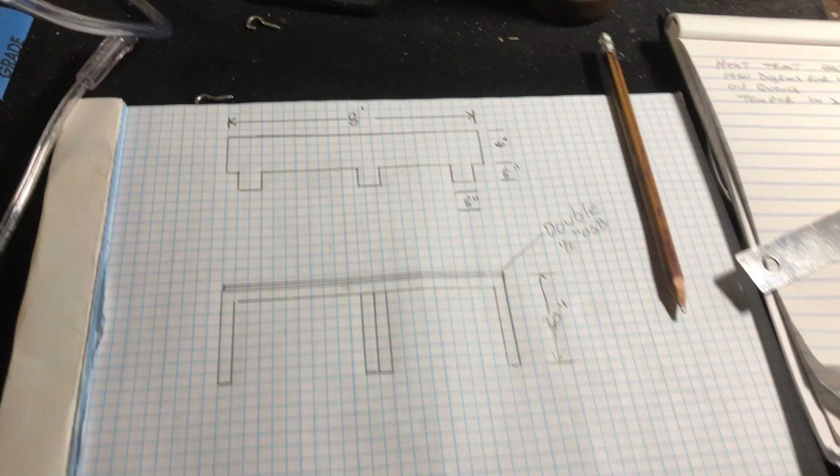Oh yeah, we're in the planning stages. I'm making a bench for my buffers. I'm gonna redo my buffing room.

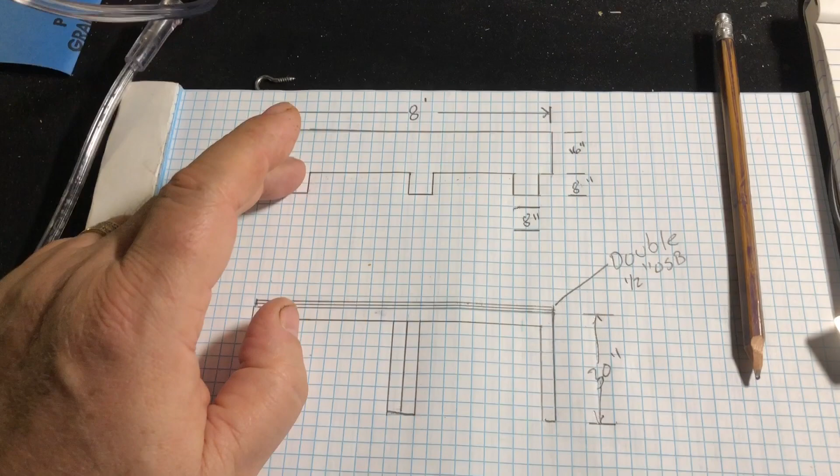I've ordered a second buffer, like my first buffer, the yellow one. Those two buffers are 22 inches wide, and the last buffer is not near as wide, I think it's 16, which is why there's more space here than here. So I'm going to have 6 buffing wheels at this station.

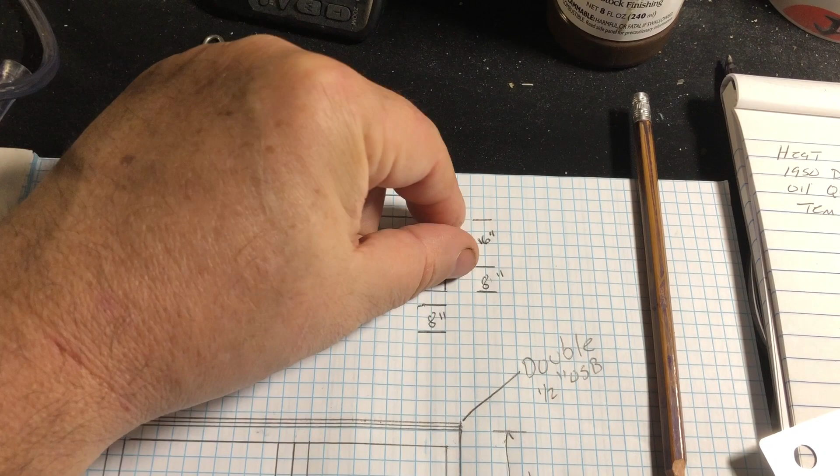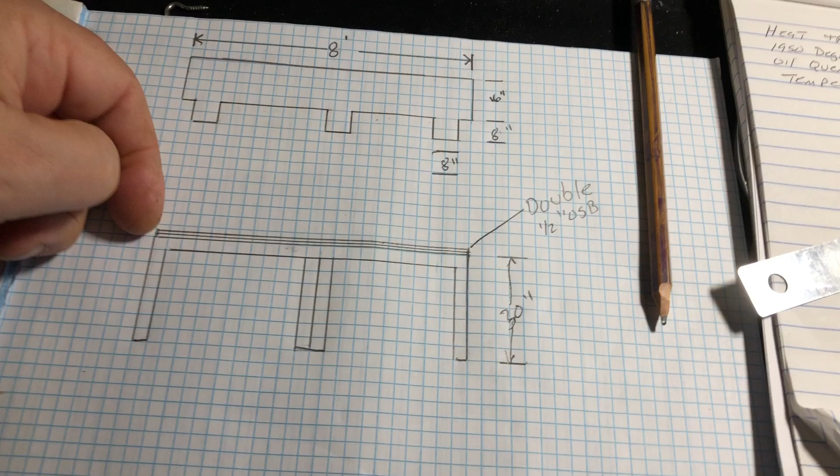It's going to be 16 inches deep, and my buffers bolt down to an 8-inch by 8-inch space, 8 foot long. I'm going to double up my 1/2 inch OSB so it will be 1 inch or thereabouts. I don't even know if it's 1/2 inch OSB, it might be, I really don't know what it is. I'll have to look, and if it's not, what I'll do is put OSB and plywood together.

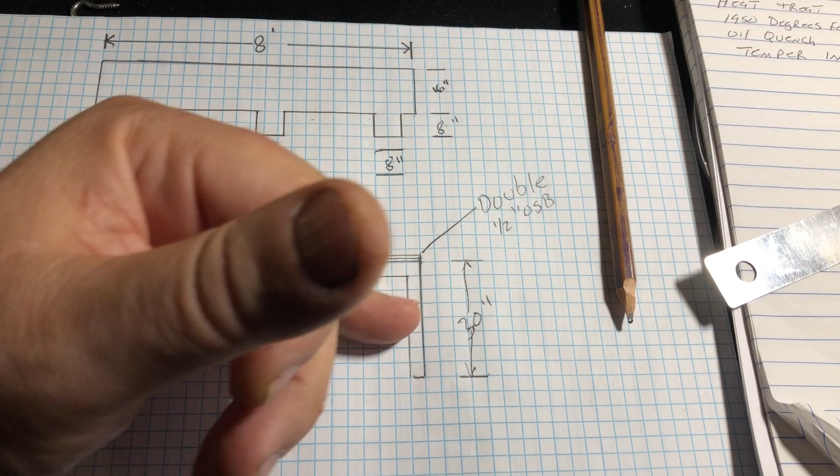It's going to be 30 inches tall. It's really short, but I have an office chair that I sit up against these buffers with, to buff with, and it's a low chair. So I just thought I would bring you up to speed. I'll take a good picture of this so you can pause it if you want to get a good look at the plans.

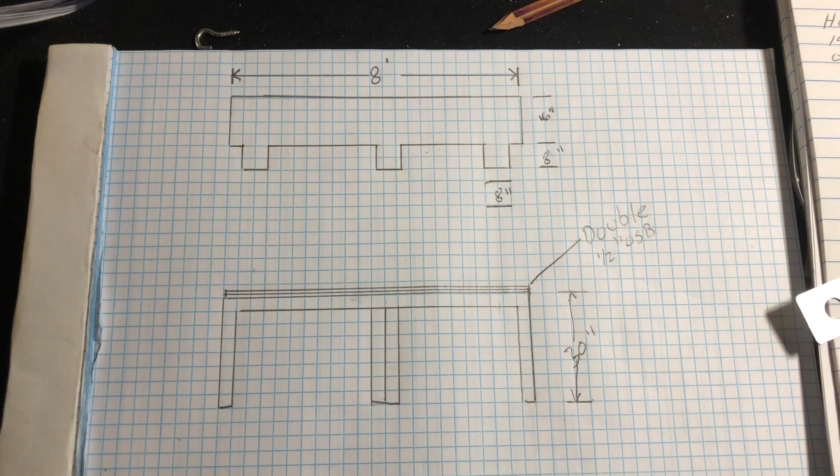But the next clip will be, I'll be out in the buffing room and I'll show you where it's going to go.

Well, I got my stainless steel in, and I realized something when I got it. It will not fit a Texas Rumble. What was I thinking?

It'll fit a swamp rat, and it will fit a Nessmuck. So, I mean, it would fit a Caddo, but my God, it's 1/4 inch thick. That's just too big for a Caddo.

Anyway, so I think I may try and make a Nessmuck. I don't know, though, I haven't made a swamp rat in a while. You know what? I'm going to make a swamp rat on that. That's what I'm going to do. Anyway, let me go show you my buffing room plans.

Today is Sunday, and I'm giving my hands another day off from this sanding, it's just my hands are killing me. All right, as I mentioned, I have another one of these coming.

That's great, but I need the 1 horse and the bigger wheels to get the hardest part of the buffing done, and that is used for the finishing end of the buffing. So all this coming out of here, and it's 8 foot between them 2 windows, and that's where I'm putting that 8-foot bench right there.

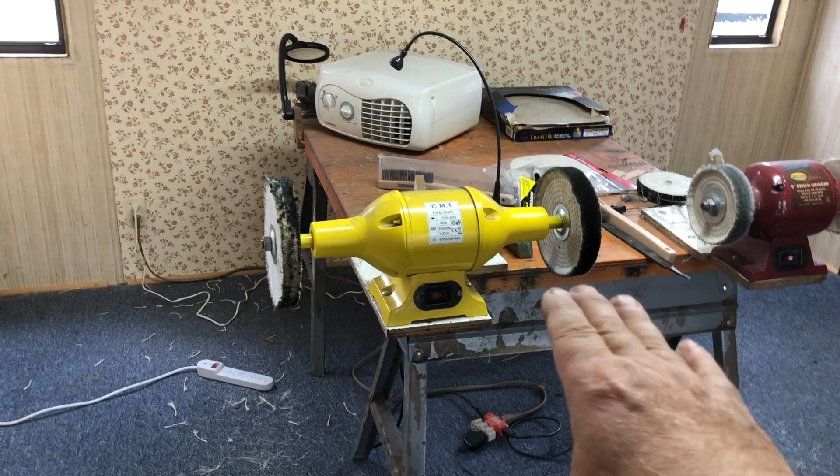About that high, actually about 1.5 inches lower than that, which is perfect for office chair height. I won't be able to get to it today or anytime soon. I have 2 knives that I've got to make.

A Caddo, and the man wants it blued. I've never blued a knife before, but Ricky has. And a dinner skinner with my mosaic pins and desert ironwood. And I've got to order the desert ironwood, I haven't done it yet.

Doesn't seem that far, but by the time I walk from there down here, I am out of breath. COPD is just, it's a curse. It is a curse. And sometimes I think I'm just on the verge of not being able to breathe.

Okay, let me start my day. I'm actually going to the shop, the small engine shop, and I'm going to tinker with the riding lawnmower that I bought a while back, the Simplicity Broadmoor, and taking the deck off of it. I bought the thing just to pull a trailer around, and that's what I'm fixing to go do. Pull the deck off it and get it ready for trailer pulling duty.

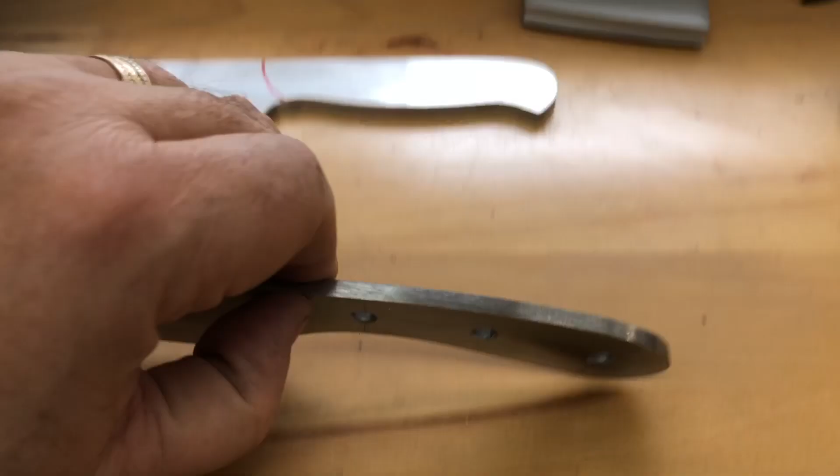I still have one caddo that's not spoken for yet. It's not a quarter inch—maybe 7/32, I forget exactly, but it's as thick as I want to make these caddos. Because the metal's so thick, I do a full grind on these too with this steel. If I'm using the 1/8 inch, I come up about 1 1/4 inches with the grind. But anyway, that one's not spoken for.

This one I'm not even going to try to sell until I've made it. This is my first time messing with stainless, so I need to make sure I can heat treat and temper it without warping. There are two ways to temper it: quench it and hope for the best, or air quench it by putting it between two blocks of metal and hitting it with compressed air to cool it. Then you have to temper it in the oven in two-hour sessions with a cool down in between.

Okay, now I'm going to my garage. I keep saying I'm going to go out and work, and then I go outside and it's really windy and cold in my garage. I keep saying I'm going to give my hands a rest today, but I'm not.

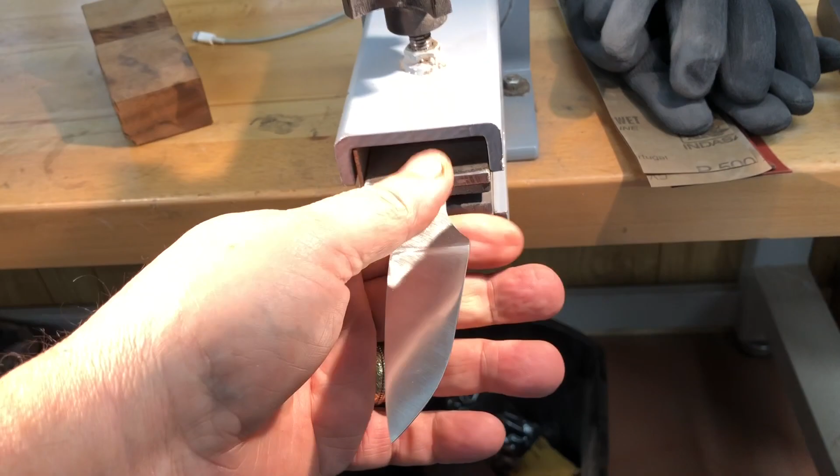I'm making knives, life is good. See you tomorrow. Well, for a person who came out here to not do any work, I got a lot done—I got the bevels ground on a Dana Skinner and a Caddo, and got them both sanded up to 320. I'm going to 500, probably not tomorrow because I've got that jury duty.

So this is David's—I think that's his name. Hold on one second. Yeah, it is, David's Dana Skinner, ironwood handles. I don't have them yet, I've got to order them. Mosaic pins.

And this is Mark's, and he's up to 320. This is Mark's too, and they both want satin finish. Mark wants his blued, so while I'm out tomorrow I'll stop and get some gun blue.

So I got an awful lot done today for somebody who had no intention of coming out here and doing anything. I got my stainless swamp rat cut out and drilled. That is just a massive piece of steel—I probably shouldn't have gotten a quarter inch. I'm not going to be able to perforate it to make it lighter like I thought, because I ruined a couple of drill bits trying to get through this stainless. That is some hard stuff right there.